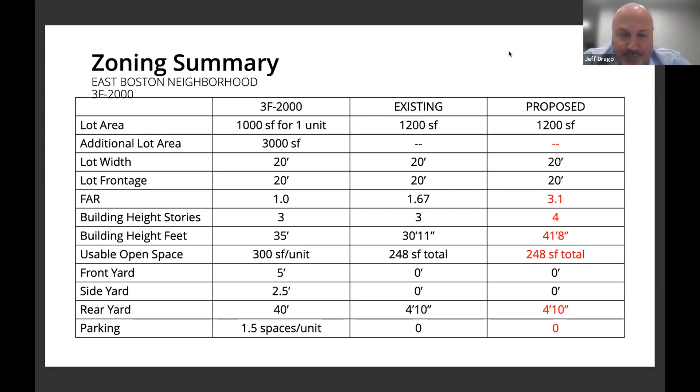Existing basement has no livable space - it's just storage area and mechanical. Unit 1 is used as a 1-bedroom now, but at some point it was used as a 2-bedroom, though currently it's an existing 1-bedroom. Then on the 2nd and 3rd floor, that houses the livable space, which is unit 2, with an upper level and a lower level with 2 bedrooms.

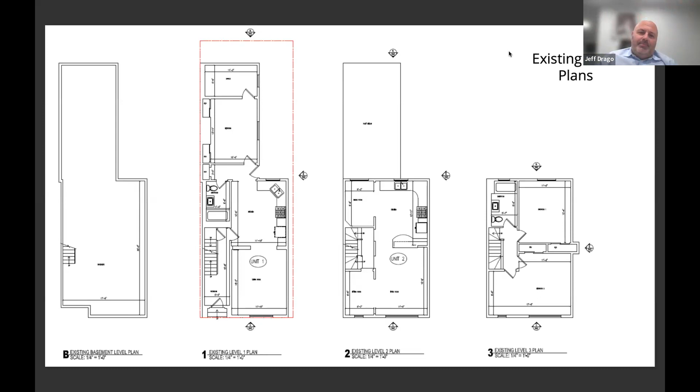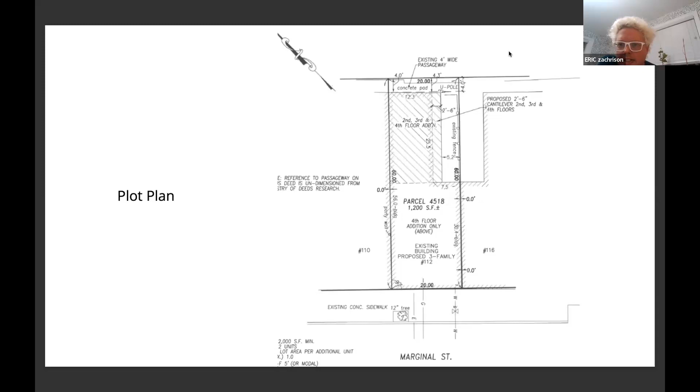Next slide, please - Eric, I'm going to turn it over to you here. Yep, thank you. This is a site plan to show how the building is going to sit on the site. Marginal Street is across the bottom of the page, and then you see the sidewalk with the existing building there. The hatched area in the rear is the proposed cantilever and addition.

The first floor is pretty straightforward - you walk in and have a living room, kitchen, and a bedroom at the rear. It's kind of a deep space, so with the addition there will be an office behind the bedroom.

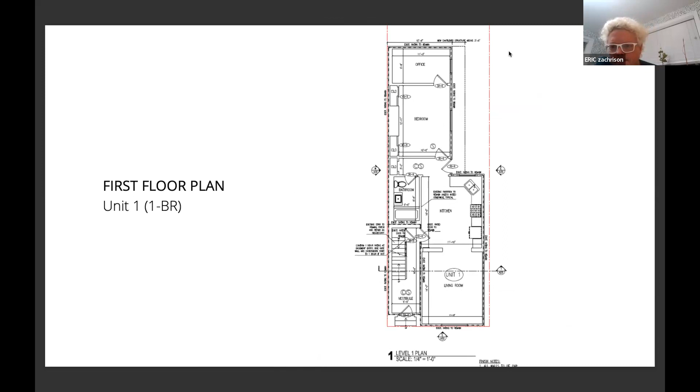Up above, you'll enter into the proper living room and kitchen in the front, and there are 2 bedrooms in the rear. Given the long, narrow configuration, you have 2 doors next to each other - the door on the right leads directly to bedroom 2, and the door on the left leads to the other bedroom, much further down. Between the kitchen and the 2 bedrooms is what we call a family scale bathroom - what you'd often see in a primary suite: two vanities, a tub, and a toilet.

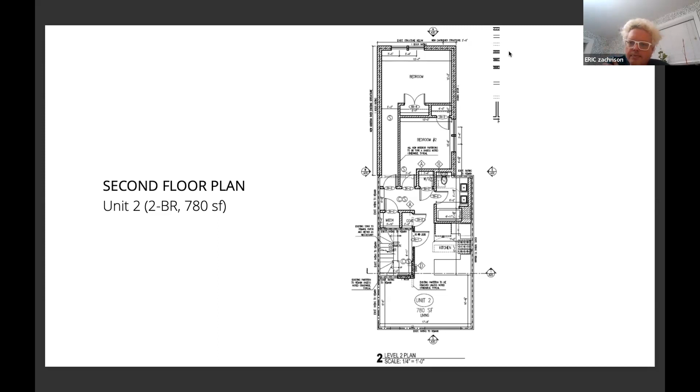The third floor is where things get a little different. In the front, we have a bedroom with a stair leading up - that's unit 3. In the back, we've got the lower level of unit 4. At this level, unit 4 has the living area and kitchen, and both units have an internal stair to the level above.

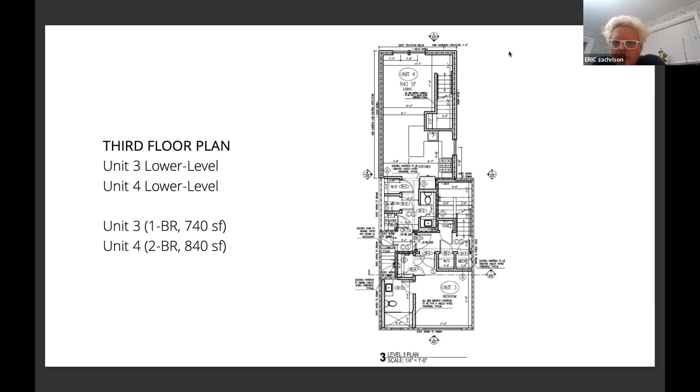On top here, we have the inverse, where the rear unit has its bedrooms on top and the front unit has its living and kitchen on the lower portion.

And then the elevations - we wanted to use a lot of the similar language and scale of what we see in this area of East Boston, with the wider window on the right, and some windows that relate to the scale of the stair on the left.

We're going to do this mostly out of horizontal plank siding. The first floor, we want to retain the brick that's there and accentuate that as a nod to what the building has been in the past.

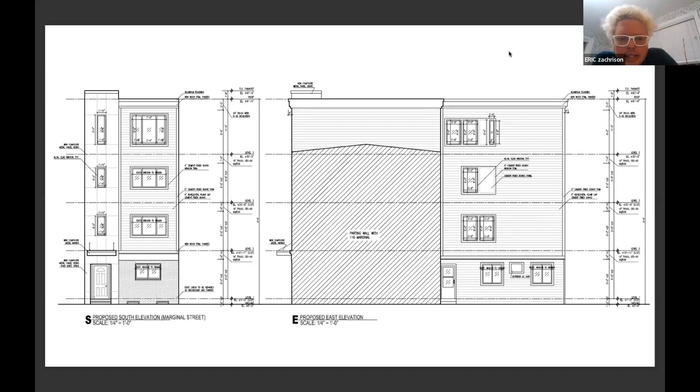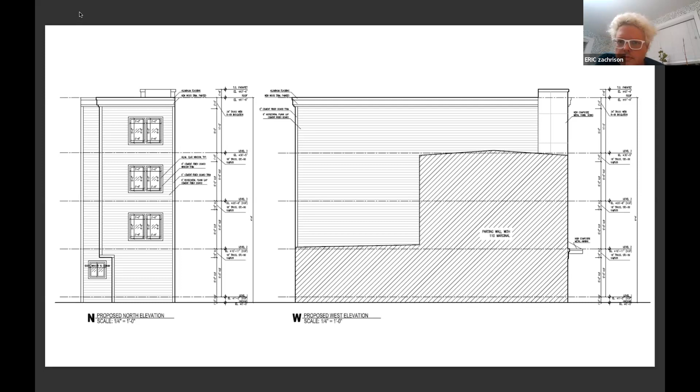Next slide. I think that may be it, that's the last slide. We apologize, we made a few changes. We have a rear rendering, it's not in this slide deck. We just got it in today, so if you want I can share it on my own, or if it comes up, if you folks would allow me to share.

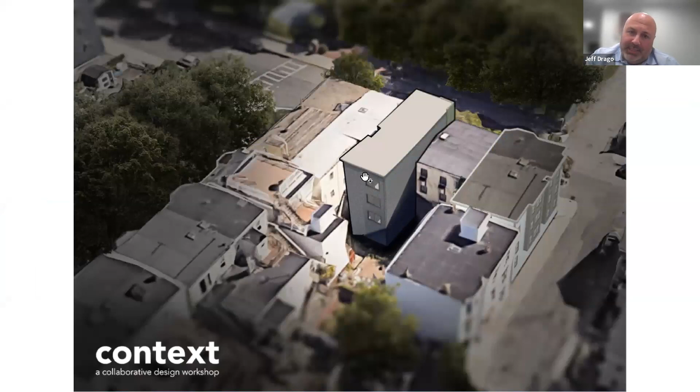Let me just make this full screen. So right now, Kaitlin, that bottom floor bumps out. We're proposing to infill the back because these units are tiny as they stand now, so it would infill that rear. Eric laid it out here, and that's with every floor. The back bumps out, and it's not quite as wide as the front, so there's a small side yard.

Would that side yard be infilled as well? Eric, do you want to touch on that? There'll still be about a 3 to 3.5 foot wide zone all the way to the back of the property, I'm pretty sure.

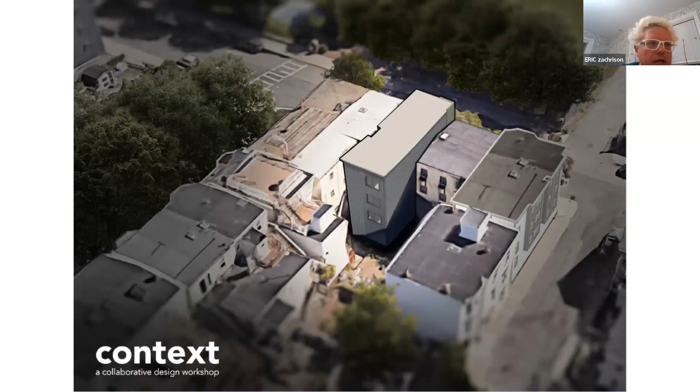Got it, thank you. I've got to revisit that, because as you're seeing in the rendering here, we were looking at the existing setback, and we might be pulling it closer now. Let me check my drawing, I don't want to leave you hanging here. There's still a setback on the ground floor all the way across, but on the upper floors we do bring that stair right close to the property line, about a foot from the property line.

Okay, so just so I can visualize it, on the first floor there would still be almost like a patio, but it would be covered by the levels above that, correct? Okay, thank you, that's helpful.

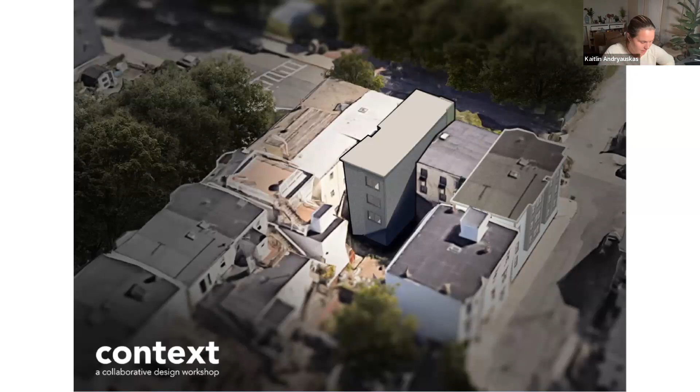And then my next question, that one was already answered. You answered that one.

You mentioned it being 41 feet 8 inches. Is that about the same size? Do you know how tall Haynes is, the new one that just went up? I don't, I think it's pretty similar in height. I'll tell you in a few seconds, but it'll take me a few seconds. Okay, I can also look it up, because I tried to keep it as low as possible on height.

And as you can imagine, when I bought the place two years ago, I had a water view and a lot, so it's coming really close in the backyard.

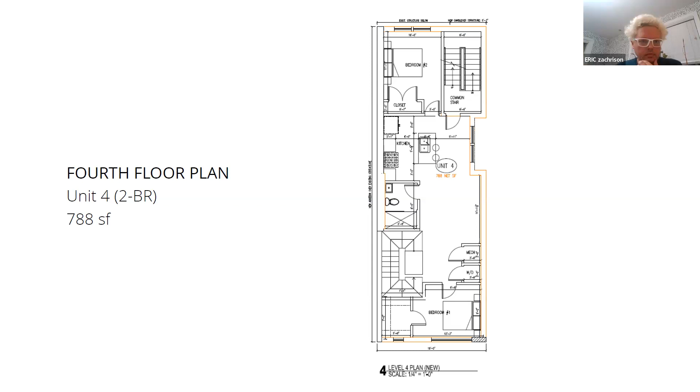I also just want to mention there's some noise coming in the background that I'm not sure where it's coming from. Sorry, everybody muted that maybe. Okay, go ahead.

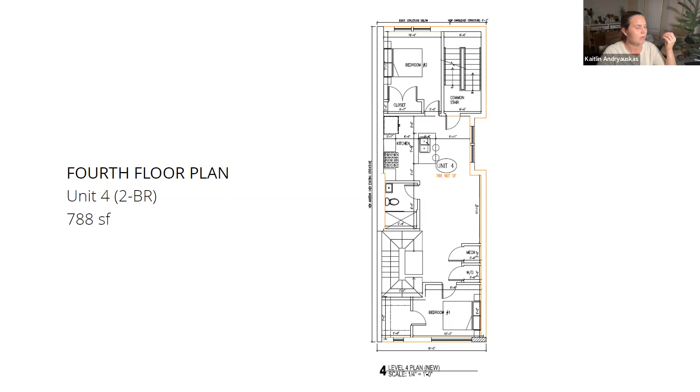Not that there's anything wrong with the modern look in and of itself, but something more in line with the way Haynes reflects the rest of the neighborhood would be awesome, knowing that particular building is a really flat building. I know we'll talk through details at some point, but just wanted to echo that. And probably also the fact that the first floor on the Haynes building is parking, not a unit, so it benefits having it be higher than in this situation, would be my comment.

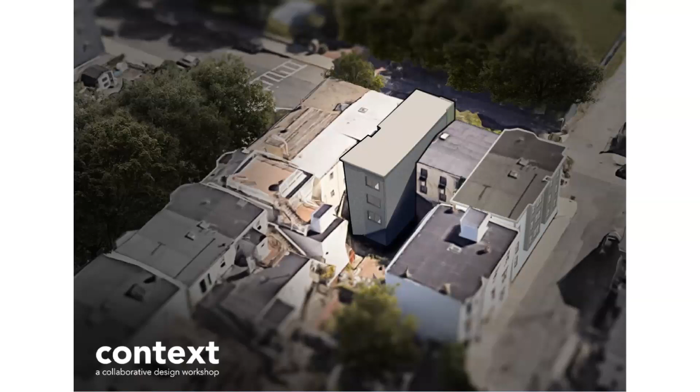In front of our building? No, in the back, between Kaitlin's property and our rear one. Yeah, there's a big utility pole there, and it always looks like — I'm not quite sure if it is the case, but the measurement might actually butt up against that pole.

So if there was any — I mean obviously there are times when utilities have to be completely reworked, but that would be at all of our expenses. Comcast or Electric will not allow any project to go forward unless everyone is serviced with all of those needs. So it would be at our expense to find an alternate location and work with Eversource or Comcast to get a spot that works. We'll go out there and actually measure exactly where this building with the addition would lie in terms of that pole.

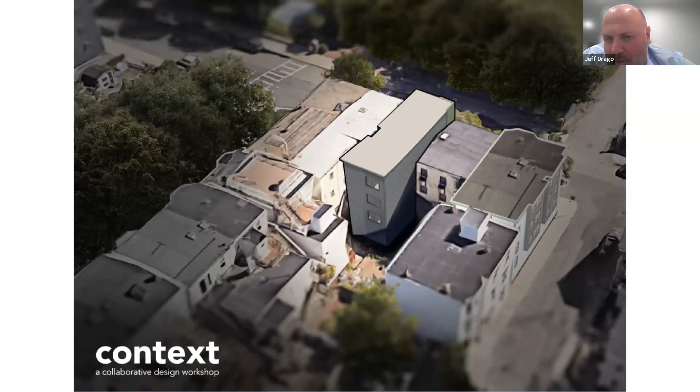Okay, thank you. Thanks, Diane. We do need to respect the time for the next project, so we need to move on. However, I think it would be worthwhile — in the notes I've got in my head, which I'll follow up with you on, Jeff — if we could get a shadow study. I know Mike feels he knows exactly what's going to happen here, but it would be good to see how it affects other properties as well.

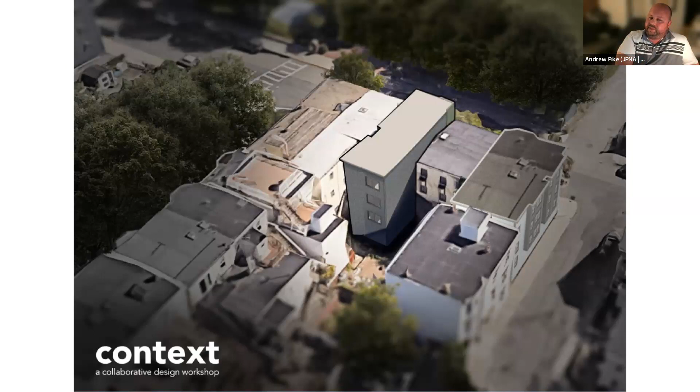Also, the screen we're looking at right now — if we could see it from the other side, the angle where you can see the gap between those two existing buildings. For example, is it 116 that is to the right of it? Yes, correct. So between your building and 116, it would be nice to see it from the opposite side, just to gauge that, in addition to the shadow study. We'll send a more formal request for the next B and Z.

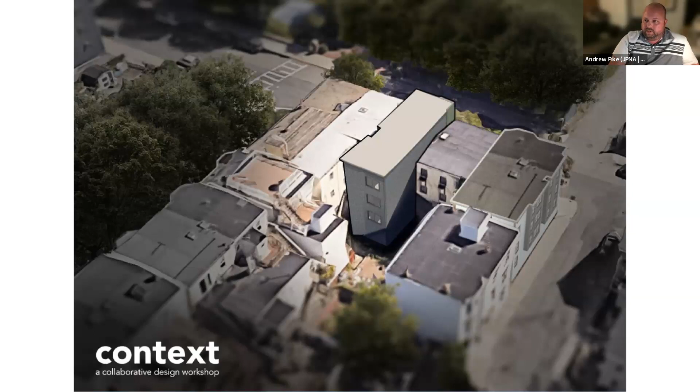Yes, absolutely, do you want me just to start? Yep, go ahead. Hi, everybody. Lorene Schettino covering for Richard Lynds tonight. I'm another attorney that works in his office here tonight for the first meeting for 49 Jeffries Street.

If we could go to the next slide. It's a relatively straightforward project. This is the renovation to an existing 2-unit dwelling, and it would essentially just extend the living space of the first unit, which encloses a deck, and there's no change in the occupancy. So there's essentially an outdoor deck that will be enclosed to allow for a better living area to unit 1.

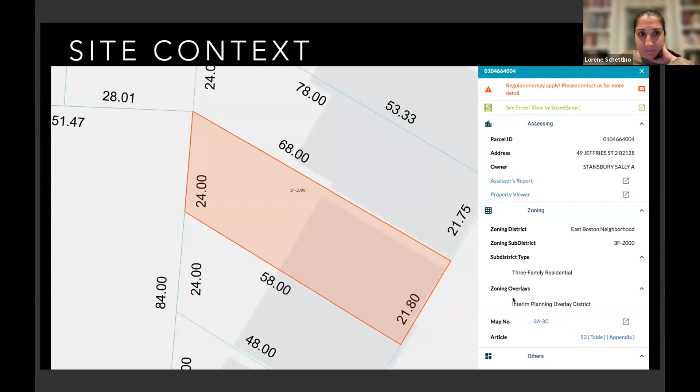Next slide, please. Just a quick overview showing the area that we're discussing, and that it's in a 3F 2000 neighborhood. But as I discussed, we're not changing the occupancy. Next slide, just showing it's outside the flood zone. Next slide, and just a quick site context of where 49 Jeffries would be, but I'm sure everybody's pretty familiar, so you can keep going through.

Next slide, just showing the building we're discussing. Just different views of the building.

So right now, this is our very first meeting with the JPNA subcommittee. We would anticipate an abutters meeting. I'm working on that with the mayor's office, and I should have that date secured relatively soon. I think we were looking at November 8th, but that hasn't been 100% confirmed yet. Once that goes out, it will be the typical process of notifying the abutters all within 300 feet, and the mayor's office will run that meeting. We would anticipate, depending on how this meeting goes, essentially coming to the JPNA full meeting next month if possible. And then we would just anticipate a zoning board of appeal hearing sometime in December or January.

Because this would need to go to the zoning board of appeal, it would likely be subject to BPDA design review, permits issuing in the spring of '24, and a very quick construction turnaround with 3 to 6 months. Next slide, please.

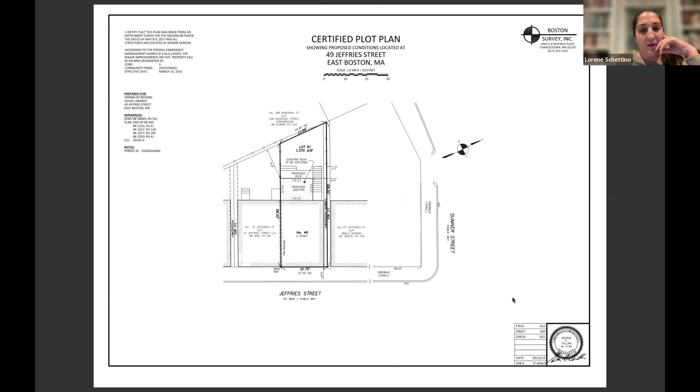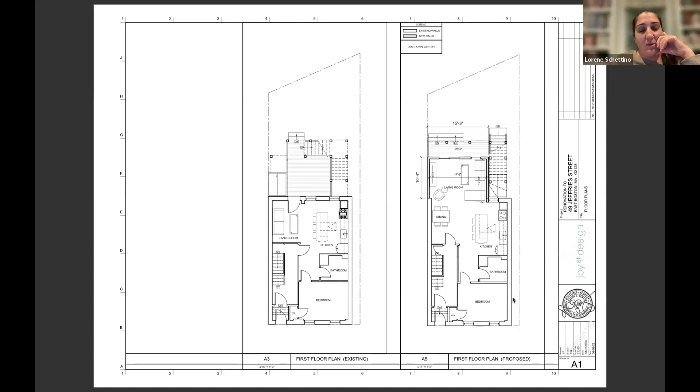So what we would need relief from is FAR, because we are increasing from 1.33 to 1.44 by enclosing that deck. There's really no change to the side yard - we're already at 1 foot and 5 inches, so it'd just be enclosing what's already existing there. And as well as the rear yard, essentially really no change. And the open space, because we would be enclosing a deck, it would trigger an open space violation.

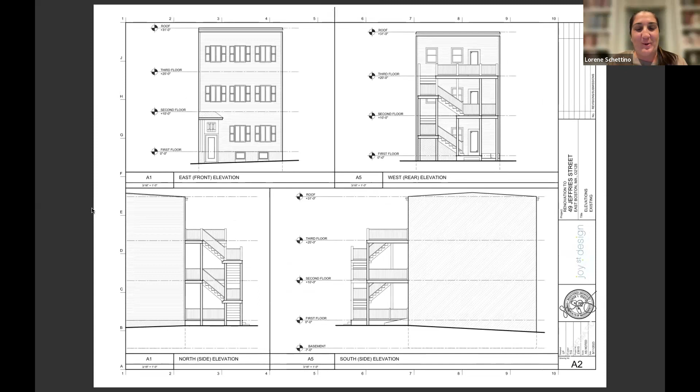Okay, actually Susan, if you wouldn't mind putting that back up. Sorry. Am I talking? It's Susan, can you hear me? Okay, thank you, can you go back to - yeah, one more, so hold on. Go, yeah, right there. What I'm - these are the existing elevations. Okay, thank you, I was assuming that, but I wasn't 100% sure. Okay, the next page is the proposed. Okay, go one, there we go. Okay, all right, I understand.

So basically you're not extending the living space past the current deck that's there, however you will be extending the deck out. The deck would essentially go out, and some of the stairways would have to go down just to be able to connect the exits from the second unit and everything. Okay, yeah, so there's a new bulkhead under the stair and rebuild the stair to the second floor deck. It outlines it right there all the way to the left.

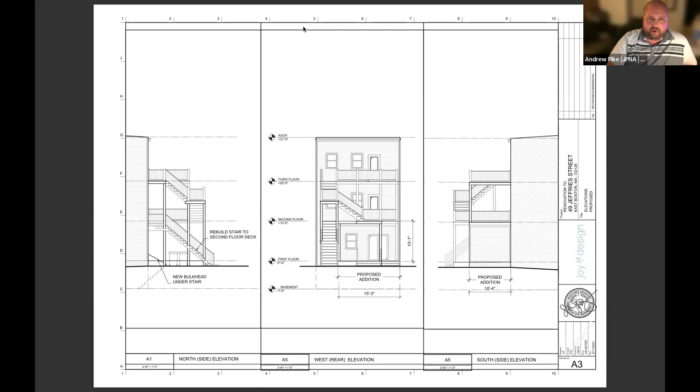Okay, if I could move my - yeah, she's circling the - yeah, okay awesome, Josh go ahead. Another board member has a question. Hey, yeah sorry, my camera isn't working today, it's because I got through Google Chrome. Anyway, but yeah, I live right around this area - not a direct abutter, but definitely within the 300-foot range.

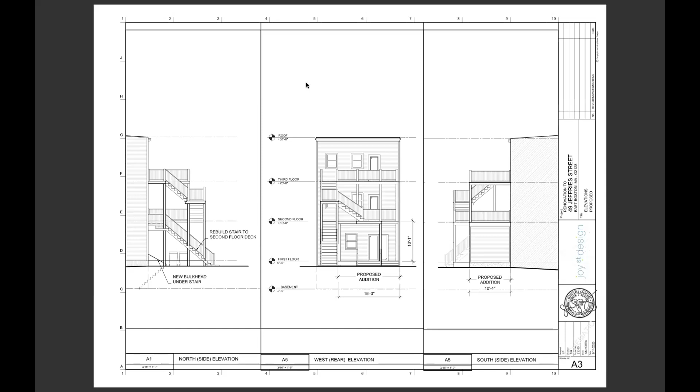So my concern is really about the construction. That's a very tight space. Jeffries Street in particular is very tight. In terms of construction, are you going to need any sort of permitting for a dumpster or anything?

It's a smaller project, so my guess would be that they'd be able to handle that with a dump truck coming for initial takeouts at the end. It would be a really quick turnaround as far as any demo goes, and it wouldn't be a lot of materials. But we can discuss that. There's different ways to handle any debris from construction.

So whether that be the dumpster, or sometimes what they do in tight spots rather than taking away parking, is just have daily pickups. And Josh, you probably realize they're building something new here, not demoing an existing building, so there'll probably be way less trash. It's going to be minimal.

Yeah, if it's kept internally or within it, that's fine. Will the homeowner be living there while this happens, or how is that? Do you know? Olivia, I believe, is on.

Hi, I'm the homeowner. There are a couple different options for me. My parents and my boyfriend are both on the call as well, so there are some alternate plans if I need to be somewhere. But I live and work in the city, so I prefer to be here, but have other options available if need be. My upstairs neighbors are also on the call, and we've discussed it at length. I hope it works out well.